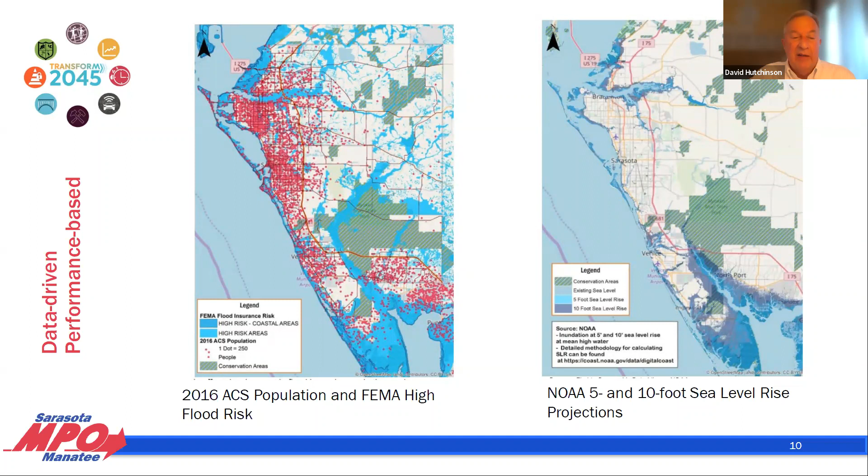You can go on to the next slide. Yeah, I don't think this was the very latest version because I had that slide at the end, but the next few slides show some of the types of data that we look at and considerations.

The point is that we are a performance-based and data-driven process, so that it's not just where I think the money should be spent, or even where one elected official thinks the money should be spent. It's a consensus process that must address the mandated performance measures. And luckily, these days, we have pretty good data.

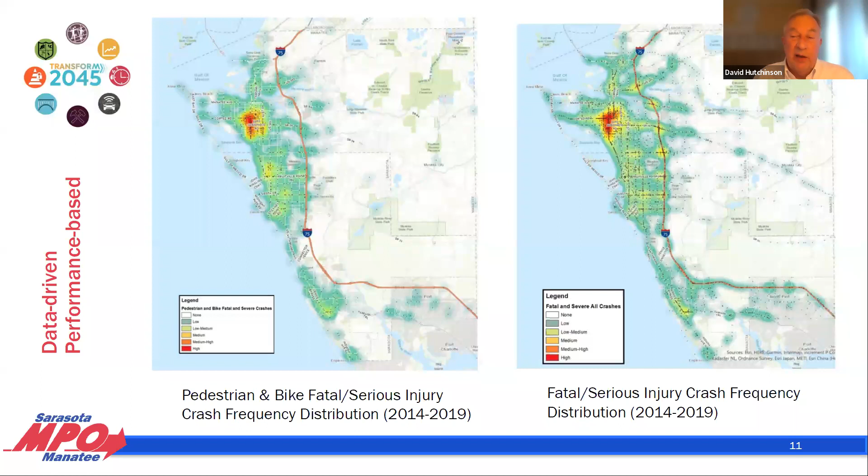We can go through these next slides. We have lots of layers of factors that get considered, such as where is congestion occurring, where is delay occurring, and how does that affect people getting to and from work or to and from local businesses, out to our barrier islands and tourism destinations. Where are there safety hotspots? Next slide.

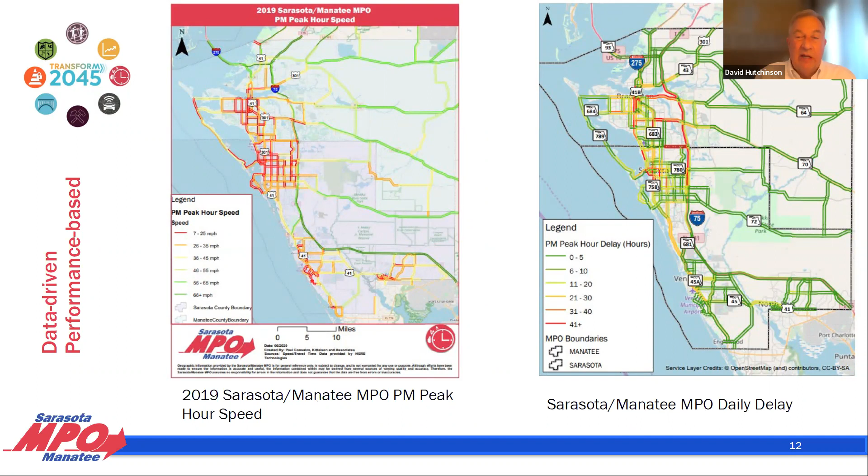And we look at where growth has been occurring, where it's projected to occur, and where employment is also anticipated to occur.

We work very closely with our surrounding MPO and urbanized areas, and with the State Department of Transportation. We are really part of a mega region, from our area clear over through Orlando to the other coast, and we are impacted by what happens in those areas, and of course they can be a source of customers too.

Out of all of those considerations, the MPO's LRTP developed a vision map of various types of investments and projects of what we would do with anticipated revenues over the next 25 years. This is the big picture of that vision and the scenario that we agreed upon regionally as to what types of transportation improvements and where they should go, we would try to get funding for over the next 25 years.

You can see that we've got investments in bicycle and pedestrian facilities, technology improvements on our systems, new roads or road widenings in some cases, and urban core redevelopment projects that will help support our community vitality and the potential for two interchanges, one at the north and one at the south end of our region.

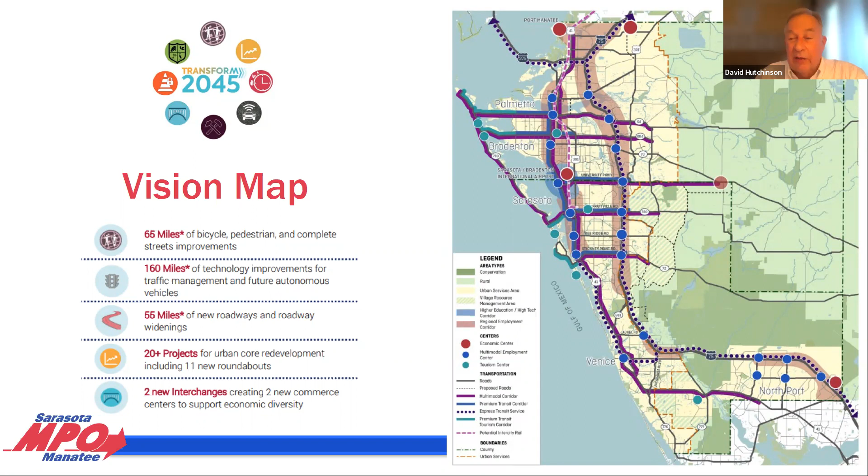After we pick all these projects that make sense and that will help us meet performance objectives, then we count the money, and guess what? We can only afford about a third of what we would like to see built. And that tells us a couple of things.

It says, well, we probably aren't going to be able to all drive on open, uncongested roads in 20 years. We're still going to have some congestion. So we have to plan for that.

We can try to influence and have better urban planning, like what we see in downtown Sarasota, for example, and in our other activity centers throughout the county. And we can improve the system so that it works for everybody.

With this slide, if you look at those numbers, you can see that we're really talking about $2 billion in this funding that the MPO prioritizes over the next 25 years.

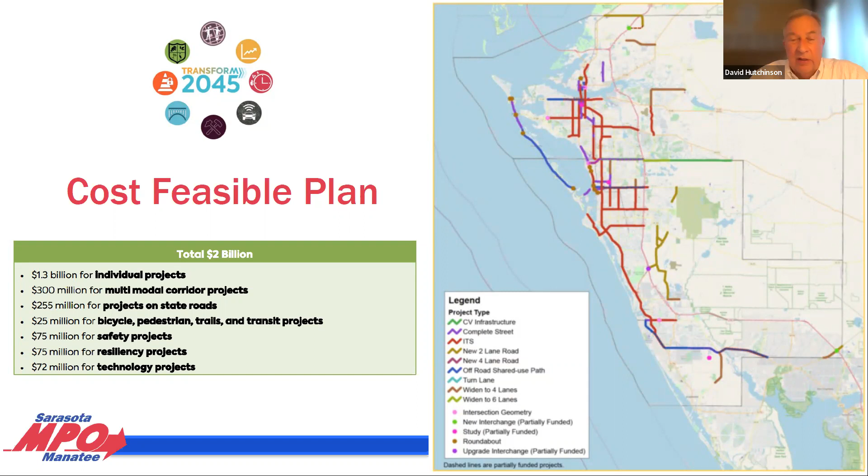What this does is it results in, and we're still working on defining specific projects, I guess that's what this slide is about, some of the types of projects that we will be looking to support and that will come out of our studies. We only do studies to get projects that can actually be built.

The next 5 years of this planning process is reflected in our TIP, or Transportation Improvement Program, and the Florida DOT's 5-year work program. You can see from this map of the $1.3 billion that's in the next 5 years, their projects are spread out all over the region, and many of them line up with projects that we have asked them to prioritize. That will support mobility, traffic congestion relief, tourism, and economic growth.

Next slide. How about, are there more slides after this? Here we go.

Some of these specific objectives that we take into consideration when we develop our plan are these: the fact that we recognize in our area, the freight, heads and beds is one of our products, and that's freight for our region. A lot of the freight within our region is related to serving the tourism areas.

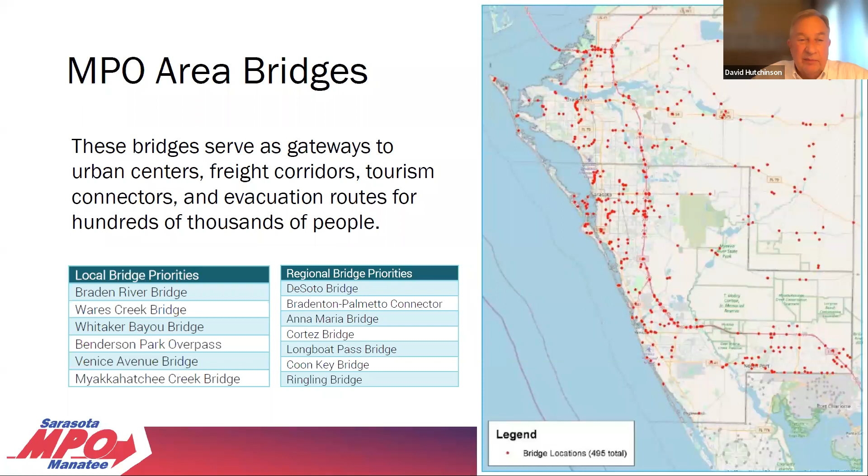Freight's important, and we've linked freight to our tourism, and a lot of our Florida DOT friends, they really think of freight as mining and agriculture related, and we think of it as deliveries of food to our restaurants and supplies for our tourist community.

So we link some of our projects that we've prioritized to make sure that the freight to our tourist destinations is going to get prioritized, not just oranges going to turn into orange juice.

A couple of initiatives that are underway now and that we'll be developing specific projects for relate to transportation improvements that support community development, both in downtown Bradenton, Sarasota, and down in the south end of Sarasota County.

Another area we're involved in is the statewide Sun Trail system and the Legacy Trail, and how it's going to be expanded and extended at both ends, as the Gulf Coast Trail is something that's underway now, and we expect lots of improvements in that facility that serves not only our residents but our visitors as well.

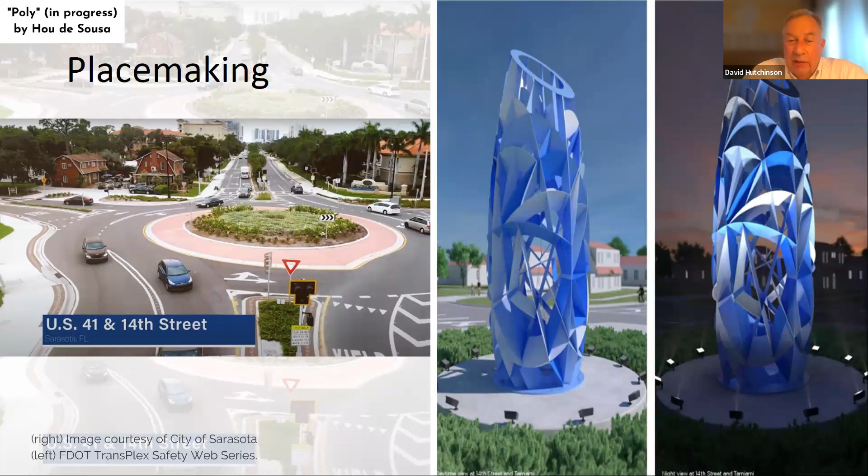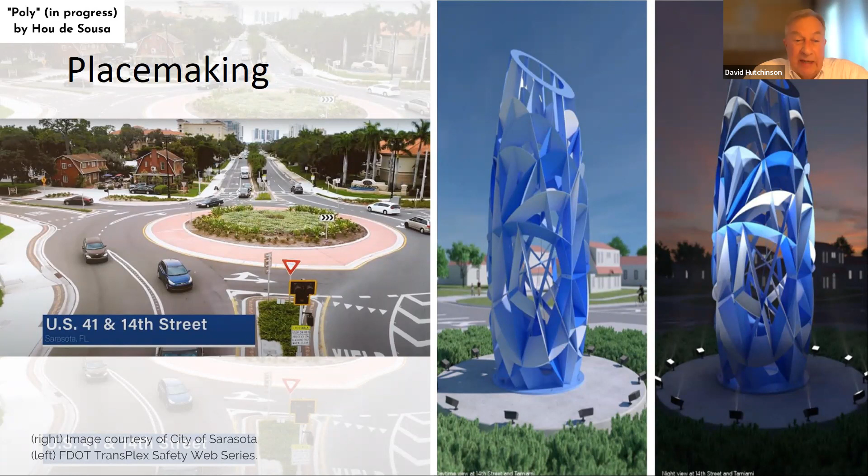That's all I have, and I'll be happy to stay on this call and answer questions. I again encourage anyone involved in tourism to get involved in transportation planning and help us update this plan in a few years.

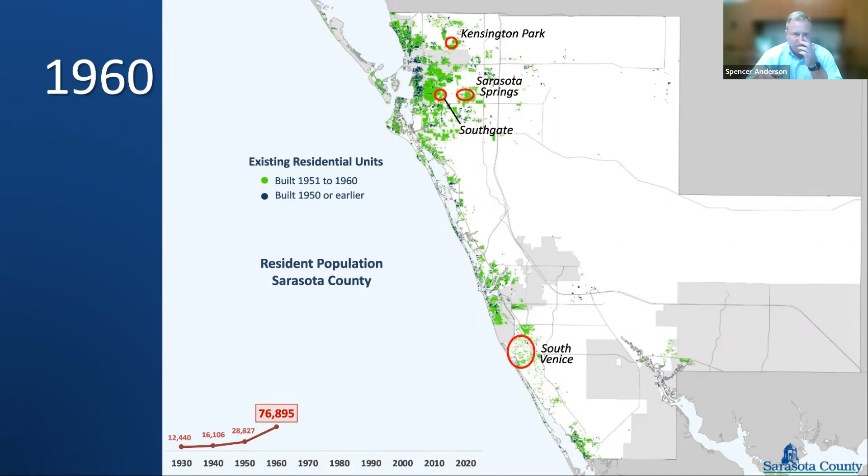This is development in the 1950s. Everything that's blue was built before 1950, and everything green was built in the decade of 1950 to 1960. This is the 60s development in green, more centralized around the coastline.

As we get to the development in the 70s, it starts to move further east, and you see a little bit of development that's really out east of the interstate as it is today. Then you start to see a little bit in the North Port area developing in the 80s as well. Then when you get to the 90s, it really does start to expand out east with the green, which is the new development.

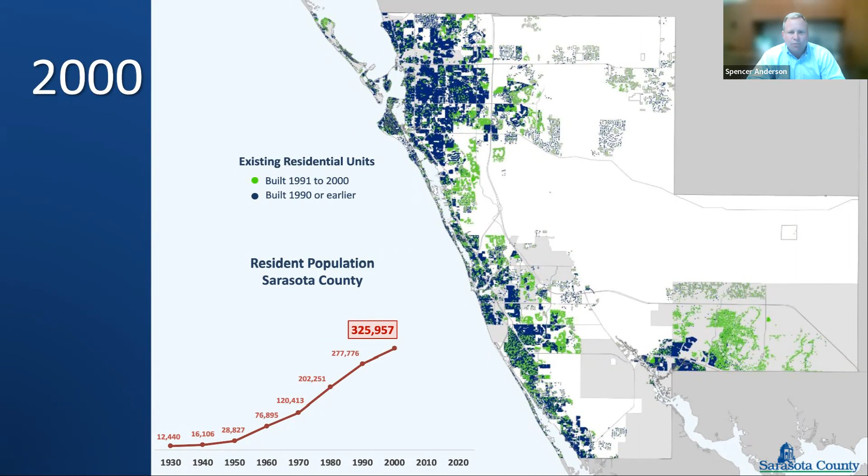The city of North Port really took off in the 90s, and then in the 2010s continued, and you start to see more development in eastern county areas, really along the interstate there. Northeast Venice started to expand, and also that Palmer Ranch area north of 681, and the continued movement east in the northern part of the county as well.

In the 2010 to 2020 slide, as of 2020, you start to see more infill development happening. You see Wellen Park that really started to take off in the 2010s as well. This kind of gives you an example of what we're facing.

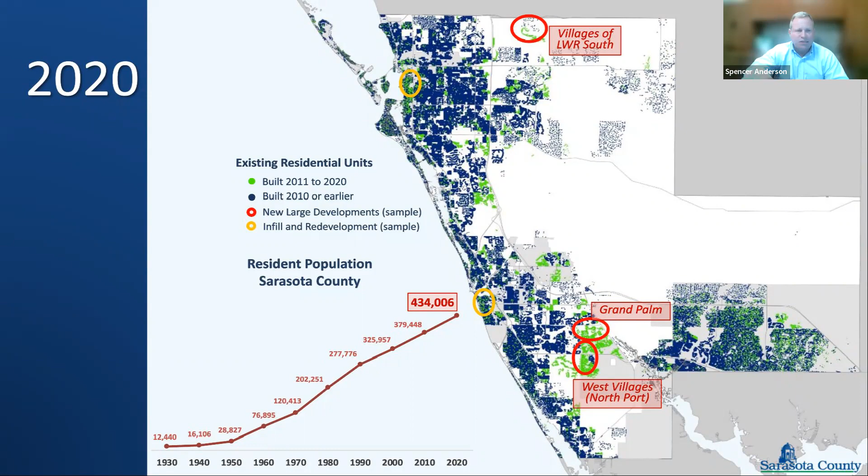In our current transportation system, we've got over 2,300 lane miles of publicly maintained roadway. That doesn't include all the private roadways out there within gated subdivisions generally, or some other private commercial areas, and 153 bridges.

The bridges are things you typically don't recognize until there's a problem with them. We do very good, like Dave was saying - Florida bridges are in pretty good condition. The state and the county work very closely together to inspect these on a regular basis and hold ourselves to completing needed repairs and replacement when necessary.

Our development in the county and our transportation system is based on the county's thoroughfare plan. Those are the public roads determined to be required, their lane configuration, and their general location. For most new roads, they're subject to a corridor study, but they guide our decision-making process for where a new road will go, what's required when new development comes in, and how we coordinate those things between governments.

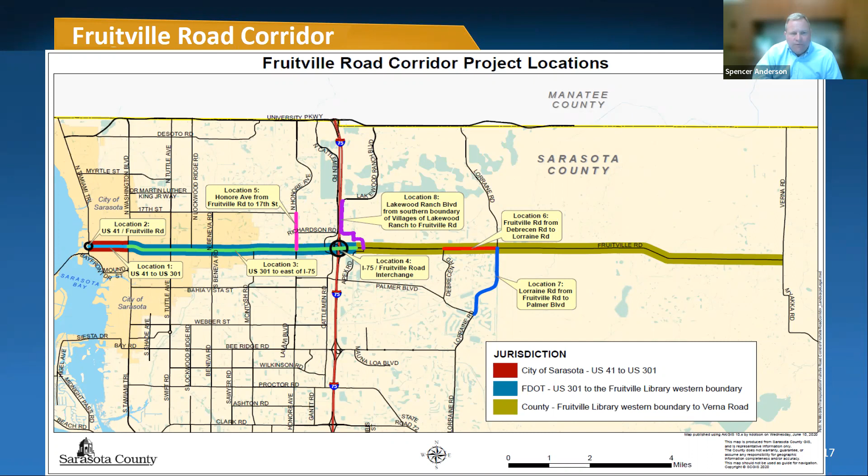So some of the things we can do, outside of road widening, is our technology. I think Dave touched on this somewhat, but our traffic technology is becoming more improved every day. Our ability to connect data between vehicles, and vehicles to our infrastructure, to know where volumes are becoming congested, and to be able to automatically, almost intuitively, have the signal system adjust on a need basis to handle large volumes of traffic where the congestion is more present. We have adaptive systems already in place along University Parkway between 75 and, I believe, all the way down to Lockwood Ridge. That's an adaptive system that adjusts itself through the day. Otherwise, we do have the ability to adjust automatically from a remote location. So implementation of technology is also a big focus where the cost of widening roads is prohibitive.

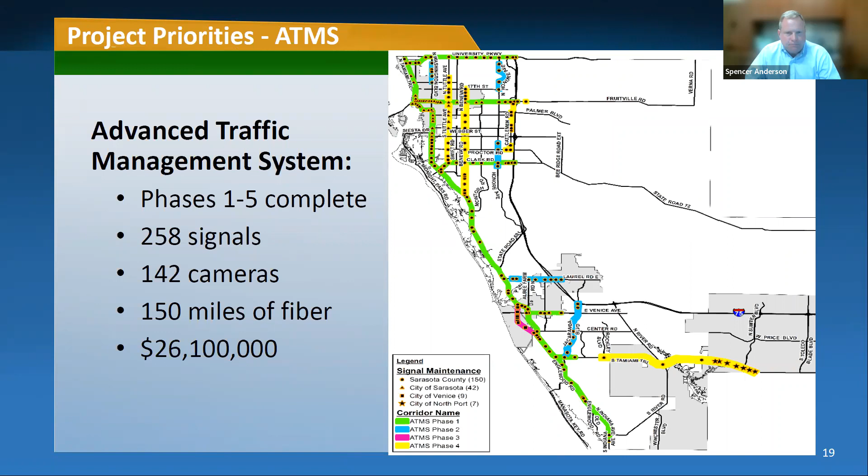And I believe one more slide. So our complete thoroughfare plan requires about $3 billion of investment. It's a long-term effort. The need for funding to do that comes from all those places I mentioned earlier, and the support of the public is extremely important when it comes down to making these projects happen. We do get a lot of people that, when they're adjacent to a project, don't want something to improve connectivity because it affects them personally. Maybe it's behind their home or around their neighborhood, and they feel like the increased traffic will be a detriment to their personal quality of life. We just need as much support as we can, and understanding of how these projects do improve the quality of life for the entire public. That's all I have. Thank you.

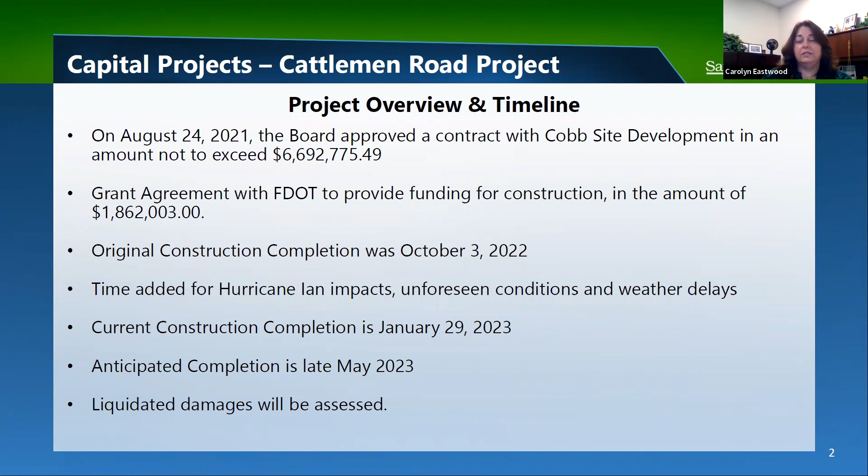So right now, that's just something that we're working with the contractor. But they have made some headway, I would say, within the last probably 4 to 6 weeks. If you've been out that way, they've installed the roadway lighting, they've installed sidewalks, they've done some paving out in the area. They're currently working east of the I-75 overpass on Palmer, installing some drainage pipes. So they are making headway, albeit they had a very slow start to this project. They're trying to make up for time, and we'll see kind of where they end up when all is said and done. Next slide.

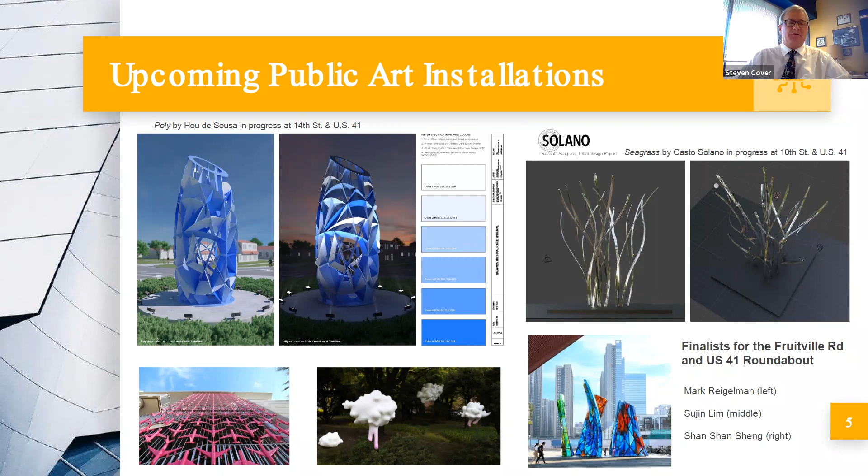One of the things we're going to be talking about a lot in the city over the next couple of years is complete streets concepts. Complete streets is really about ensuring that whether you're walking, biking, using e-scooters, or using a bus or vehicle, you want all types of users to feel comfortable using the corridor.

Recently, one of the projects we first implemented in the city of Sarasota is Ringling Trail, which accommodates all kinds of users. Sarasota County extended the Legacy Trail into that this past March of 2022, and we ended up accelerating our Ringling Trail project from Legacy Trail all the way to Orange to ensure connectivity from the trail.

Ultimately, our goal is to connect it all the way down to the bay, to Bay Park itself, and also down to the Barrier Islands. Some of the other projects we're working on right now are the 10th Street and Boulevard of the Arts Complete Streets project. Our plan is to really transform those two corridors, especially since it connects to the Bay Park itself.

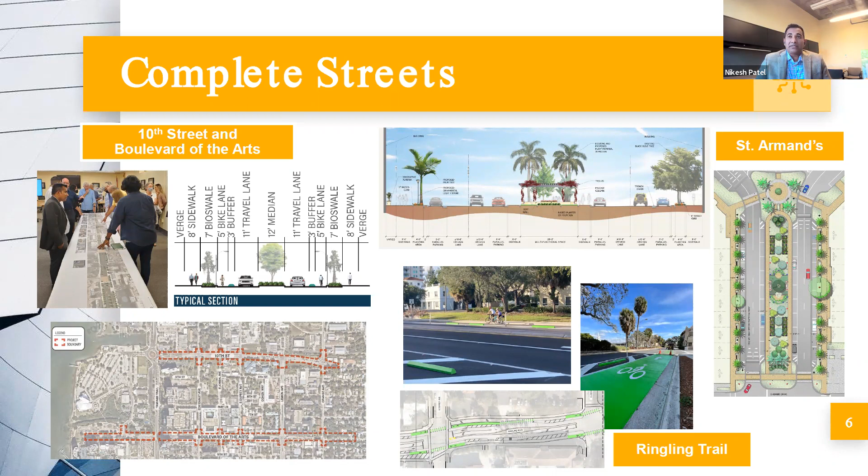As a lot of you know, this past March we kicked off two different transit options in the city of Sarasota. The first being the trolley called the Bay Runner, which runs from the easternmost point of Main Street, down Main Street, then across the Ringling Bridge over to St. Armand's, by the beaches, and then all the way out to the park. The ridership numbers have really been phenomenal.

We're over 105,000, probably close to about 110,000 now riders for the Bay Runner. Really interesting. I've gotten on the Bay Runner a bunch of times, and I always like asking people why they're taking it. Obviously a lot of tourists take it, but a lot of residents do as well.

I know one couple who lived in the northern part of the Rosemary district. They walked to Main Street, hopped on the Bay Runner, went to dinner at St. Armand's, took the Bay Runner back, and then walked back home. So we're just getting some interesting feedback.

But we're still finishing off our first year with this program. We've got two more years where we have significant state funding, so as we get closer to the third year, we'll have to assess from a financial standpoint how we're going to continue to run this. Because it's been so successful, one thing I'd like to look at—not necessarily right away—is potentially running a north-south route of the Bay Runner, which would go down South Tamiami, go north, and eventually link up with the airport, which I think would be a really interesting connection.

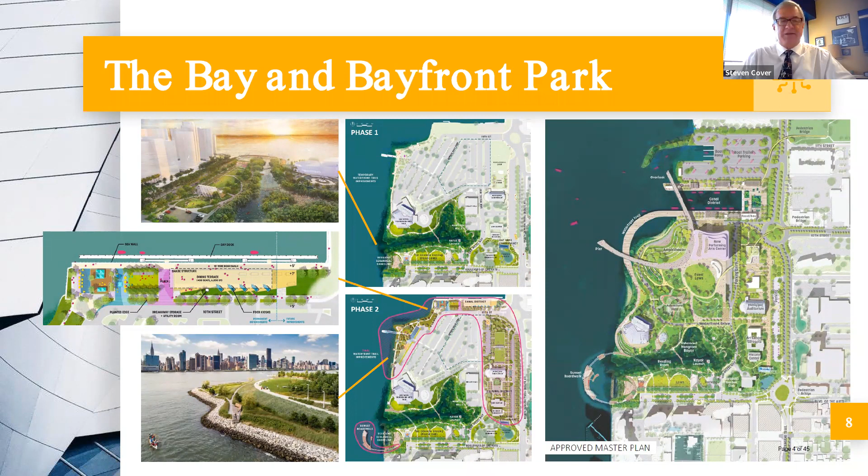On the east side of the city, we're working on the Bobby Jones golf club itself, as well as the wetland restoration. This is a partnership with Sarasota County that we're working on for this project.

The other thing we're looking at right now is connecting the existing Legacy Trail, the Sun Trail program that Dave talked about earlier, as well as the Florida Gulf Coast Trail. We're trying to get a connection from the Legacy Trail all the way up to the county's future park on 17th Street. Currently we're working with the county, Trust for Public Land, MPO, and DEP on alignments and how we're going to connect it. Ultimately it's to connect to the connector that Spencer talked about, which is going to go over the interstate with a multimodal connector, tying all these pieces together so we can have the Florida Gulf Coast Trail connected. So that's in the works as we speak.

We're still in the planning stages. We do have all the right of way for this specific project—it's just a matter of leveraging funding and providing partnerships to move this project forward. Next slide.

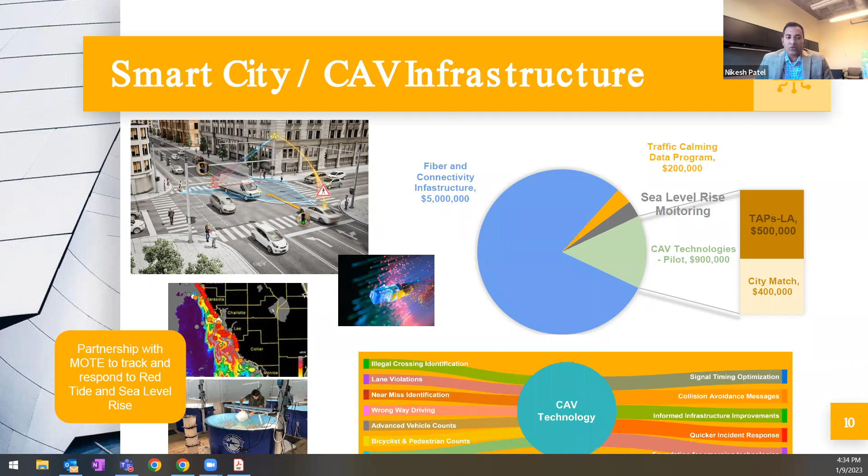So with that, that's all I have within the city, unless Steven, you have anything else you want to add? No, I think that's it. I think you covered it, Nick.